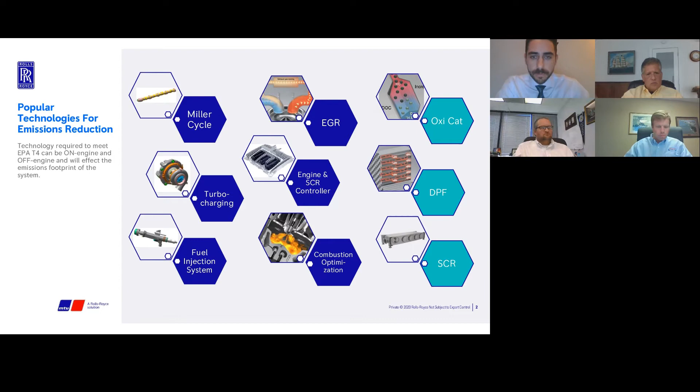For the purposes of this presentation, most of the market has moved towards SCR technology, so I'm going to focus on that. The benefits of combining on-engine technologies with an SCR behind it: when you combine these different strategies, you can reduce the hydrocarbons in the cylinder, in the combustion chamber, to the EPA Tier 4 limits. You can reduce the particulate matter to Tier 4 limits. You can reduce oil consumption, improve fuel consumption through a better specific fuel consumption. That comes at a strategic increase of NOx, so we've all decided we're going to handle NOx after the engine within the selective catalytic reduction.

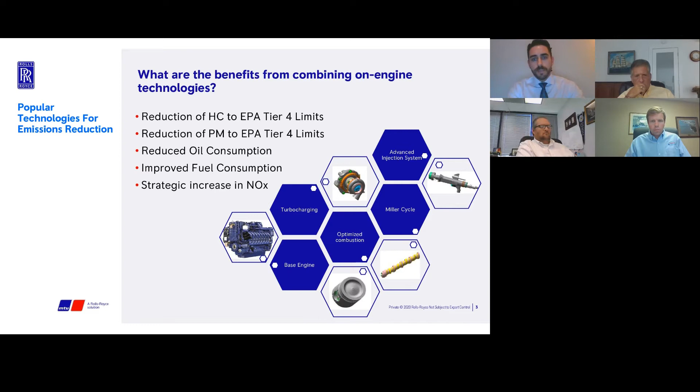So the SCR technology behind the engine, the penalty in NOx can be easily offset with the SCR system as discussed before. There's an integrated closed loop controller that monitors the NOx in and NOx out of the system, and can adjust the DEF dosing. The engine and SCR controller allows all of these technologies to work at the most efficient levels, so you're not exactly blind dosing, if you will.

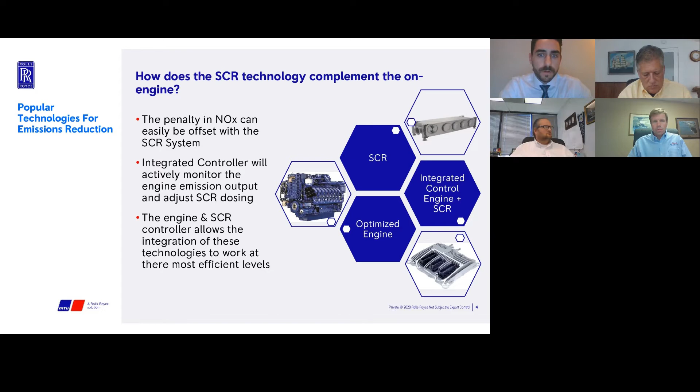Most importantly, from the perspective of customers out there, or someone new to EPA Tier 4 technology wondering how this new technology is going to impact them, I've created a couple slides of the considerations and the benefits. So, operator considerations.

It's no secret, the SCR technology after the engine requires a larger footprint for the overall propulsion package, and tankage, specialized tankage, climate controls, those kinds of things. So this all has to be considered in the design phase of the project.

It requires increased ventilation because the SCR rejects heat, so you have to do an analysis on the volumetric air flow through the engine room and make sure that's taken into account.

In some cases, air versus airless dosing. If you're doing air dosing, you need a larger compressor with clean air in order to make sure the system functions properly. This could result in increased cost and space claim for a larger clean air compressor. It just needs to be taken into consideration during the design phase.

There's additional maintenance with this new technology, so there will be some increased costs to the operator in the life cycle cost studies. And now there's a little bit more administrative work, because the EPA requires delegated assembly tracking of these components as they make their way into the marketplace.

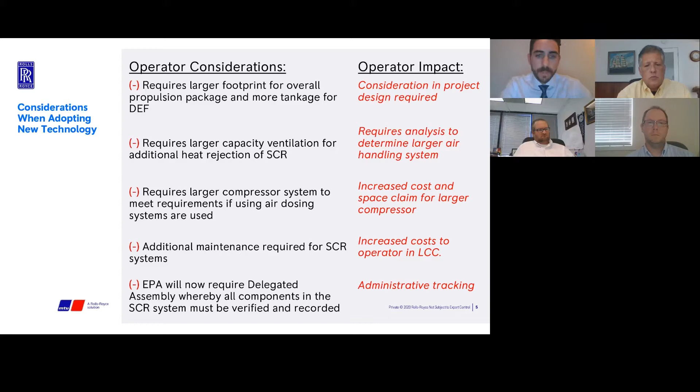So the benefits: the base engine remains fairly the same. The diesel engine that you used to see in the past for Tier 3 looks very similar to the diesel engine for Tier 4 if you're using SCR.

The fuel system could be a little bit different. There could be some small changes here or there, but for the most part it's the same foundation. It also allows for the best fuel consumption throughout the performance map, because you can tweak the specific fuel consumption and the internal combustion, since the NOx will be offset after the engine.

But of course, there will be costs associated with DEF consumption.

The SCR system reduces some exhaust-borne noise and can minimize the muffler size that's needed. You may only need a pancake muffler after. So there could be some potential savings where you don't have to have a larger muffler with a large space claim in a stack. There is little to no impact on transient performance, so you'll still experience good engine acceleration and low-end torque.

The SCR allows the use of various sulfur fuels around the world, and this is a pretty important one, considering that some of these vessels move throughout various parts of the world, and you never know what kind of sulfur content you're going to get in your fuel. So it gives you some operational flexibility.

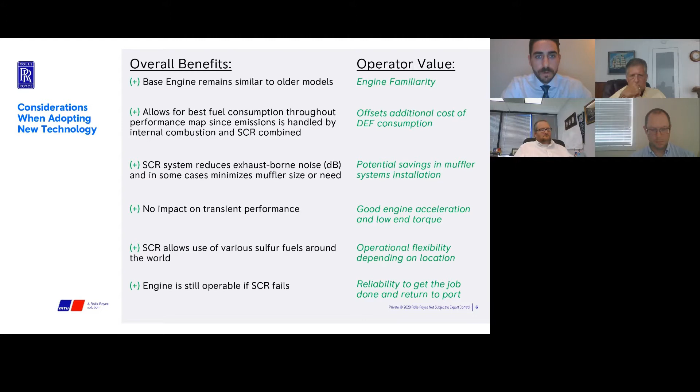And the engine can still operate if the SCR fails, so this is a benefit from a reliability standpoint. So those are the considerations and benefits for this technology.

And just to give you a little idea of the space claim of these types of systems, here's a profile, and then some renderings of some systems that have been designed into different vessels.

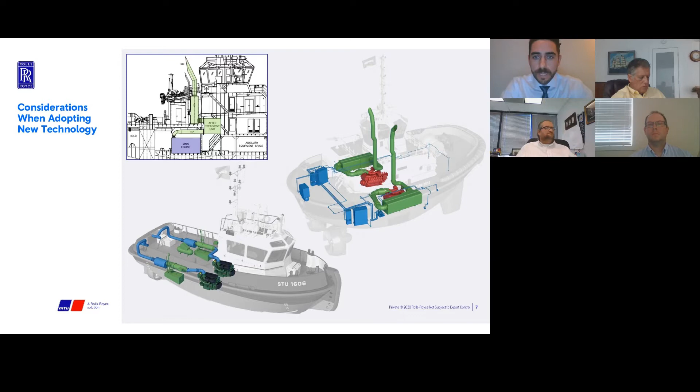So thanks, everyone. I just want to turn it over to Rich at this point, but thanks for giving me the time. Richard, are you able to drive from your side, or do you need me to help you? Can you drive? Would you mind driving, Jim?

There you go. Good afternoon, everyone, glad to be here with you today. I'm going to give you a quick update on the EMD Tier 4 solution.

Obviously, customer comes first. We want to make sure that you always have the highest possible uptime, lowest OPEX, lowest CAPEX. And from a service and maintenance point of view, we need to keep it as easy for your crews to understand and to maintain as possible. And we don't want to compromise on the engine performance that you're used to from Tier 2 and Tier 3, because we equate transient response with operational safety, maneuverability. It has to be as easy to operate and service as previous engines.

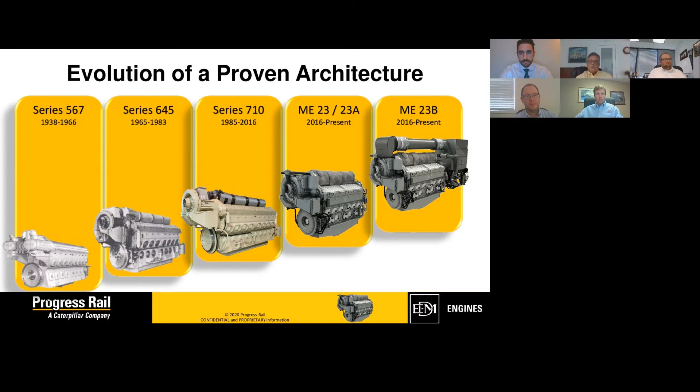So by using that as the background for the discussion here, the previous generation engines, the largest portion of the population that's operating on the lower rivers, on the U.S. inland rivers, lower Mississippi, upper Mississippi, Ohio, and other tributaries. Relative to those older engines that are 30, 40 years old, today's Tier 4 engine consumes quite a bit less lube oil, on the order of 60% less than those older engines, their earlier designs. We've come up with kits to help reduce that, but using the original lube oil consumption of the original engines, that number is quite large.

Double-digit reductions in fuel consumption as well. And the transient smoke is also much lower than the predecessor engine because the turbocharger moves more air, relatively speaking. We've increased the output -- back in the 80s with the original 710 engine, and today's evolution of that engine moves a lot more air, and so you get that transient response with a minimal exhaust opacity.

And so, as easily understandable, we have Tier 4 certification. That means we emit very low levels of NOx and particulate matter below the regulated standard, and do it with less smoke and without compromising that transient response.

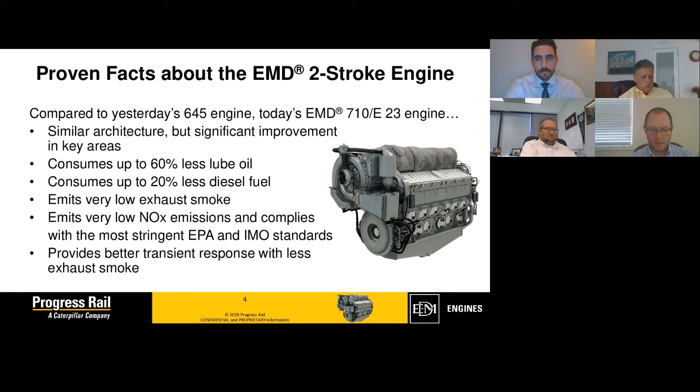With the SCR approach -- I believe I speak for my Caterpillar colleagues as well -- using their approach to the dosing control system and to the SCR approach, we're able to maintain the transient response while reducing NOx, which in many other cases, reducing NOx using other technologies such as EGR actually comes at the cost of transient response. So we've maintained that superiority going forward with Tier 4.

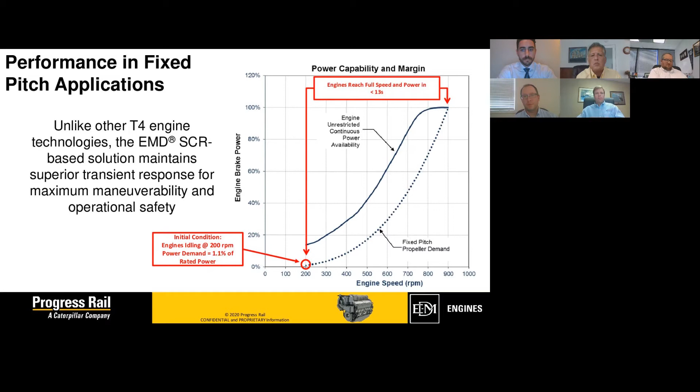Hybrid is becoming a common discussion point in the industry, as we're all trying to find ways to reduce emissions and work with flexible powertrain systems. High transient response is also a benefit for diesel-electric solutions, whether constant speed or variable speed. An engine with very quick transient response is a favorite of electrical engineers and designers that engineer these hybrid systems, because whenever there's a transition from one power source to another, the faster it can respond, the more transparent the operation is to the pilot.

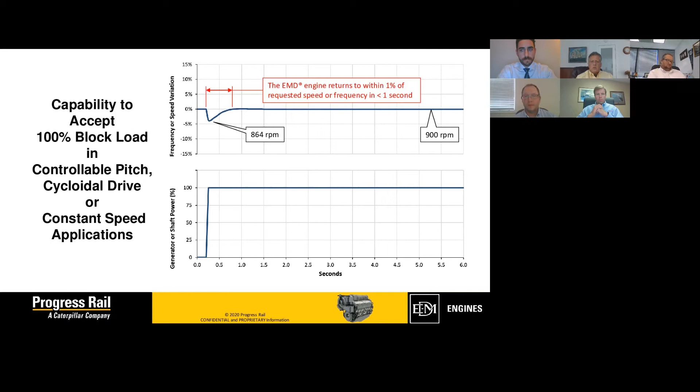Using that small size enclosure, relatively speaking, for a medium speed engine, and then using Caterpillar's closed loop dosing control system—looking at the pictures Tim Peters showed earlier, many of those Caterpillar powered boats use the same exact dosing control system. So there's commonality building across the fleets there as well.

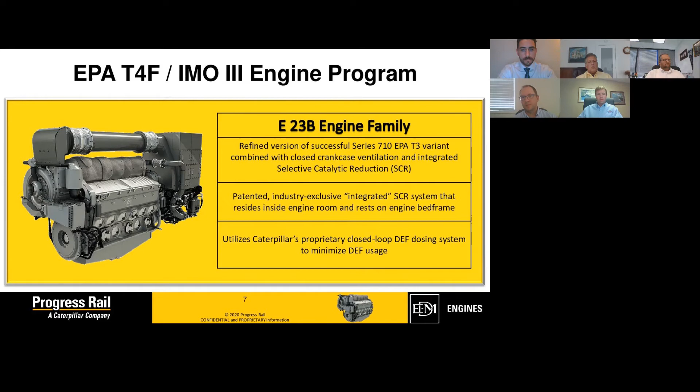We would install the engine first, then the structure beneath the SCR, which we call the accessory rack. It's a very stout frame that rests on the engine bed frame. It contains, just for space saving reasons, some engine accessories like lube oil cooler, lube oil filter, and thermostatic valves, so those don't have to be located elsewhere in the engine room.

It's a kind of labyrinth flow SCR, not just a straight through kind of flow path. There's a lot of benefit to this when it comes to installing a Tier 4 medium speed engine into a vessel, into a workboat.

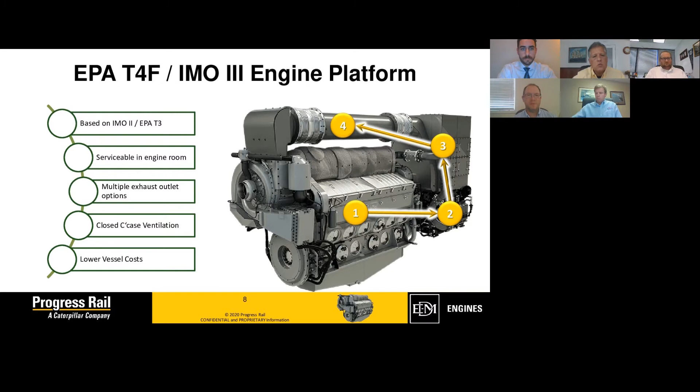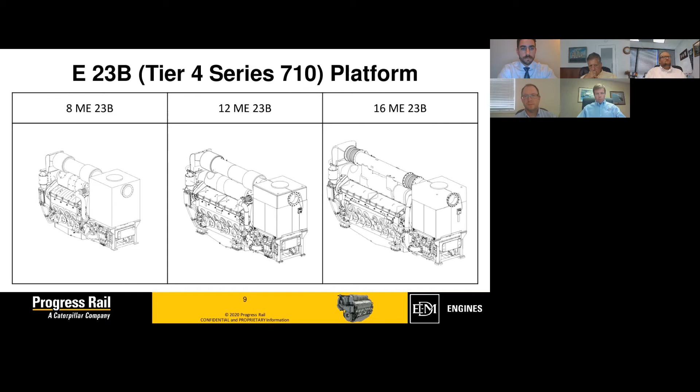Our very first Tier 4 delivery several years ago was for the Washington State Ferry MV Suquamish, and that one has been operating since 2017.

Staten Island Ferry is, you probably have seen videos and press releases of them launching the Ollis class ferries there. So those have not entered service yet, but those are underway at the shipyard.

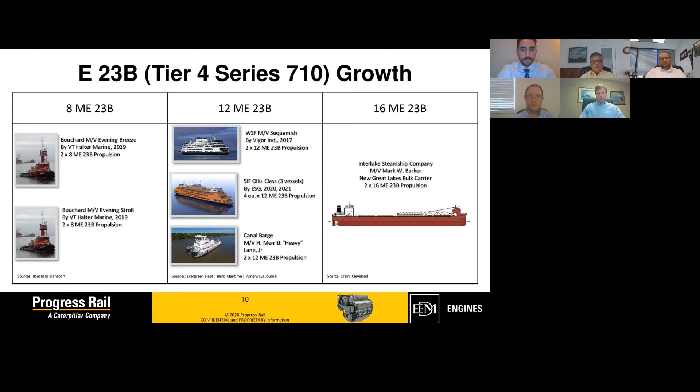I'm going to highlight our references with Canal Barge. You can move on to the next slide here, Jim.

The H. Merritt Heavy Lane Jr. is our very first Tier 4 reference on the rivers, and it's the very first EMD Tier 4 engines in operation on the lower Mississippi River. Again, we're very honored to have earned Canal Barge's trust for this project.

Canal Barge did a lot of research into the appropriate power for this project, and we were very, very honored to have won it. It's a traditional fixed pitch propeller drive, so all the merits that I explained earlier that we tried to preserve with the previous engines, we believe those added value for our value proposition here for the Heavy Lane. It's their flagship vessel, and as far as I understand, I believe these are the only medium speed Tier 4 engines operating on the lower Mississippi River.

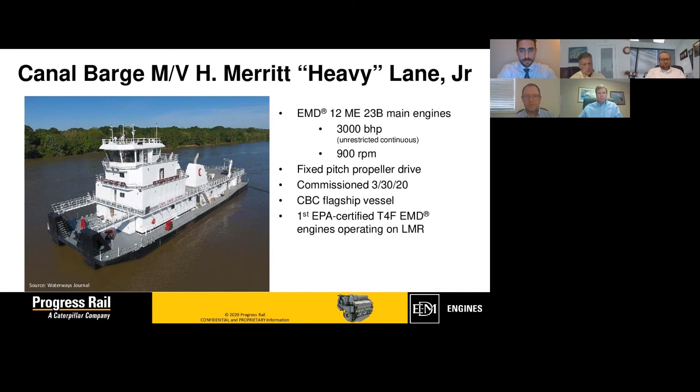So where do we go from here? Where have we been heading with the technology fairly well defined, fairly well accepted? We've been communicating the information on the solution for several years now, and we've taken input from industry on how to further improve it. On the engine side, it's essentially the same engine, just improved.

It's that constant improvement approach, reducing lube oil consumption to make it work better for Tier 4. There are obviously additional diagnostics to talk to the after treatment system, so there's some additional operator training happening there, but no major structural changes from the predecessor product, which is, I believe, again, a benefit, because your tooling is largely the same for servicing the engine. Understanding how the engine operates, troubleshooting it, is unchanged.

Moving to the right side of the slide here, this is where the focus has been from a training and diagnostics and technology comprehension point of view, knowing that we're leveraging our being owned by Caterpillar. You can see the footer of my slides there. We are a Caterpillar company, leveraging not just their products, but working together on understanding how the products should work to meet our customers' needs.

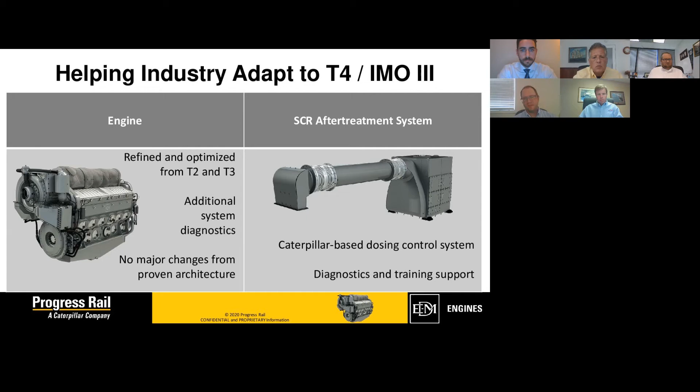In the slightly longer term, this is on the horizon, we're taking a bit of a reverse approach. We started out with an integrated package that's all plug and play, but now we're working with shipyards, naval architects, and end customers on applications where the engine room is too tight for both the SCR and the engine. So we're working with them on properly applying the SCR to remote locations.

Whether that means us just verifying pressure drops from the engine to the SCR, or actually having our engineers do a computational fluid dynamics simulation that helps us understand the DEF vaporization and distribution through the catalyst, everything that's needed to make sure the shipyard, naval architects, and end customers have confidence that the system will be fully compliant with EPA requirements.

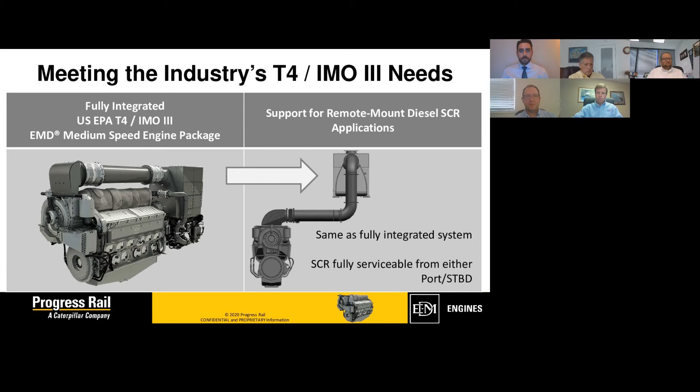And that's in a nutshell, a summary of what you've gone through.

Now, John Burton, are you able to join us on phone? I hope so, can you hear me? Yes, no, it's good.

So I can kind of carry on some of the message. When everybody hears after treatment, it's panic. We don't want this. So just fast forward to slide 3, Jim, and I'll start right there.

We're on slide 3. The feedback we get is this is too big, we don't want this thing, we can't get DEF. You've heard all the technical presentation from the guys here, so we're all using similar technology.

What we did, we took this message out to the field. We went out and talked to the naval architects, the customers, and the operators. The naval architects and ship designers and builders took a look at these and said, okay, this doesn't look so bad, we can work with this. At the end of the story, when some of these boats are out here running, the feedback we get is this SCR stuff was no big deal.

So the message is it's tried and true technology. It's been around since the 1950s. It's proven and simple technology, fairly easy to install. So forward, Jim.

We went out and talked to all these people, talked to the naval architects. We took our technical team to talk to your technical teams out there. We brought some of our factory engineers to the job sites. We did a lot of teleconferences with naval architects to go over what we call the virtual design review. So we were more or less remote consultants on some of these designs.

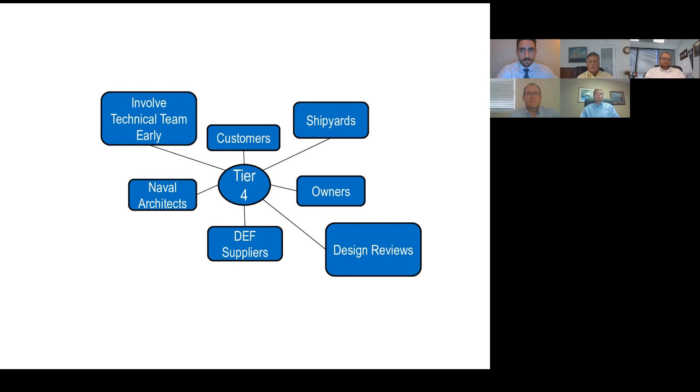How does the engine room look? Are these components laid out properly? We can't fit this - is there anything we can do? So we worked directly with a lot of the shipyards and naval architects to make sure these installations went well. On-site support, remote support, a lot of people on the phone. I was at your site. So forward.

And here we are. So we've got widening acceptance of the Tier 4 product, the IMO 3 product. In the U.S., we're governed by the EPA Tier 4 guidelines, but there are a lot of successful projects on all of the coasts, starting to gain a little bit of traction on the inland rivers, as Rich and Tim pointed out. There's also rapid acceptance and rapid growth to meet IMO 3 regulations, primarily in Europe, to meet those inland waterway requirements over there.

And so, we're all here to help you be successful in your projects, give advice. Rich commented that he had engineers on site. Tim's talking about technology. So we're all here to help you design these, help you guide your designers, be there to help these projects be successful. So my message, reach out, come talk to us. We're here to help.

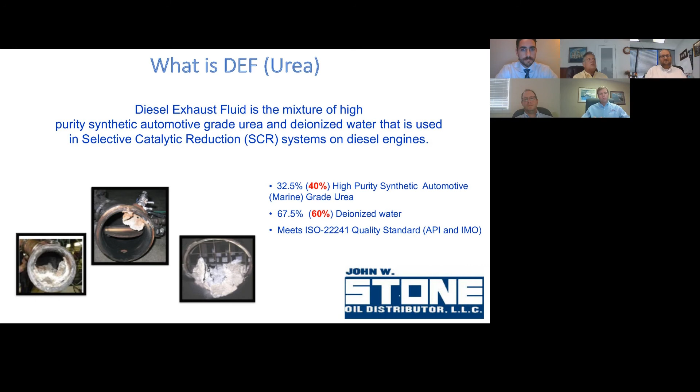There's some operational issues that need to be resolved, but from our conversations with the OEMs, it's been that you can't intermix the 32.5% and the 40%. So I'll go on to the next slide.

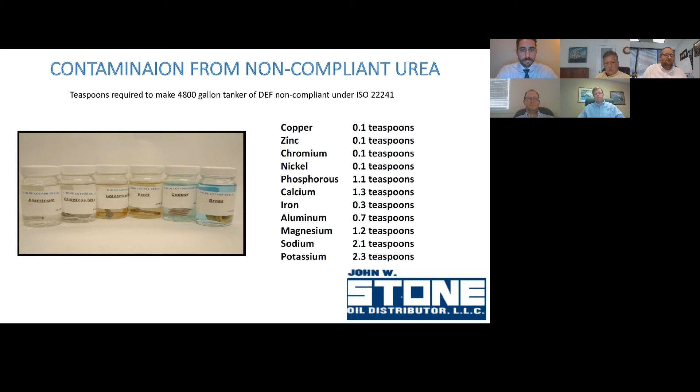As a visual, we've got some samples out there. Just as a visual notation, by no means is that the only way to take a look at it, but you should be asking for a certificate of quality, much like you'd be asking for a certificate of quality or certificate of analysis on your fuel. You ought to be taking a look at and asking for a certificate of analysis on the urea.

Again, there's always been concern about handling protocol and PPE requirements. As an overarching comment, we've been delivering urea and DEF in the maritime field since about 2011. I'm going to tell you what I tell our truck drivers: use the same precautions you would when handling diesel. If you feel you need gloves, use gloves. If you feel you need a face mask or eye protection, absolutely, we encourage it. But it's not something to be afraid of.

In past presentations, Jim and some of the other guys have seen me pour the 40% urea on my hand and just wash it off. There are some cute anecdotes I've got for you, and a few not-so-cute, a little disgusting anecdotes I could share with you offline, but it's not something to be fearful of.

Some of y'all are dry cargo haulers. One of the dry cargoes out there is urea, is fertilizer. Treat it like fertilizer — that's the basis of it from a 50,000 foot view. It's a purified fertilizer with purified water. If you're not afraid of handling urea fertilizer, then you shouldn't be afraid of handling this stuff either.

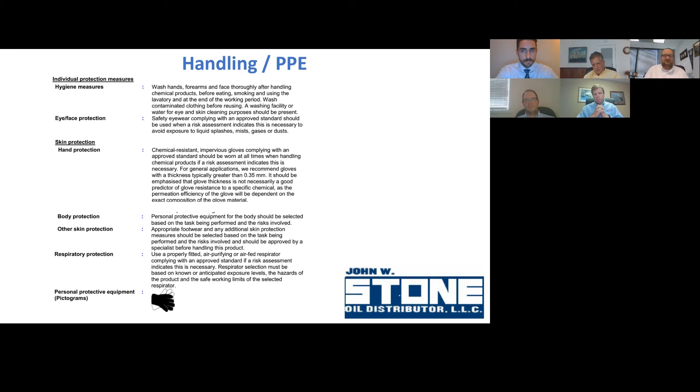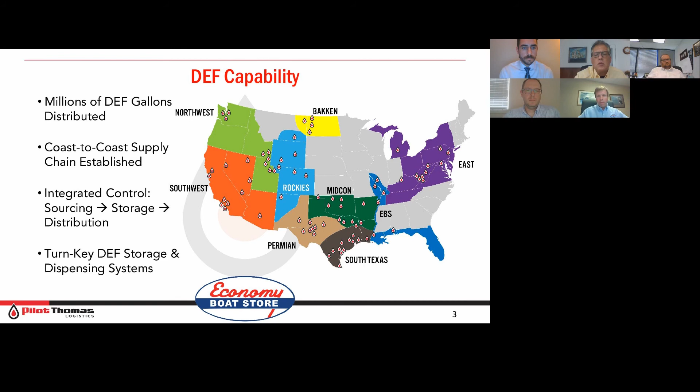Through some of our affiliate relationships, we've actually got connections with manufacturers of DEF as well. In various channels and distribution markets across the country, we've also got turnkey DEF storage and dispensing systems. So from a capability standpoint, we certainly have that squared away.

Secondly, from an availability standpoint - Tony mentioned it, and a couple other presenters have as well - there's a couple different specs of DEF available. One is the 32.5% blend, the other is a 40% marine spec that you often see. We're actually capable of supplying either one. From a marine standpoint, some OEMs have advised they'd prefer the 40%. The 32.5% is certainly what you see on highway or over-the-road vehicles.

From a supply perspective, the 32.5% is much more prevalent. But if there's a tendency toward the 40%, Economy Boat Store and other suppliers or midstreamers out there certainly are, or should be, capable of providing that for you.

In terms of our delivery or transfer capabilities, what we've done up to this point is primarily deliver via 55-gallon drums or 330-gallon totes. With our fuel flats throughout the system, we've got a bulk offering concept designed, though we haven't formally made that investment to make it available yet. Some of that's working with our customers to better understand demand forecast and demand profile, but the investment's ready.

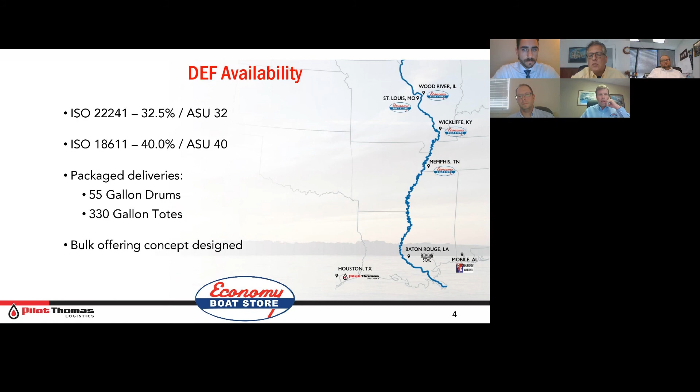Quality control wise, a couple of things Tony mentioned - I thought that was a great slide on how sensitive this is to chemical impurities. It's certainly a high maintenance product to some extent, but it just requires specified or dedicated tanks, pumps, hoses, and nozzles - not a considerable investment. Stainless or poly tanks are required to maintain the integrity of the product, so keep that in mind when working with OEMs or manufacturers and engineers on putting this equipment in your vessels.

A couple other points: it does have a freezing point, something to keep in mind, and the 32.5% product actually has a much lower freezing point. Some of our more northern locations, Memphis North as an example, 32 degrees could come into play - so that's another potential benefit of the 32.5% option.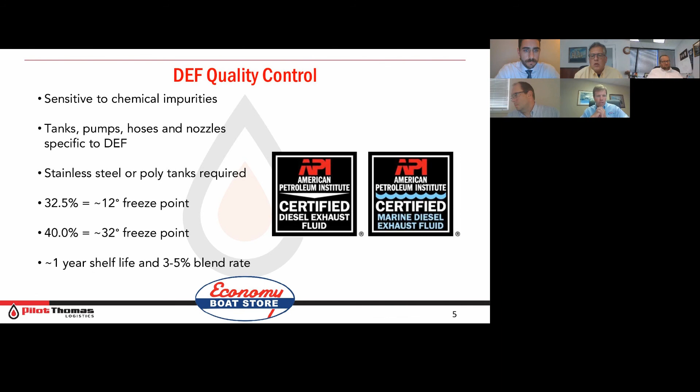Lastly, just a couple points - the useful life on DEF is about 1 year. Avoid direct sunlight, manage it at correct temperatures, and from a consumption standpoint, for every 100 gallons of diesel consumed, we'd estimate a 3 to 5% ratio of DEF for urea. Similar to other midstreamers or suppliers out there, we pride ourselves at Economy Boat Store on making product available when and where it's needed most.

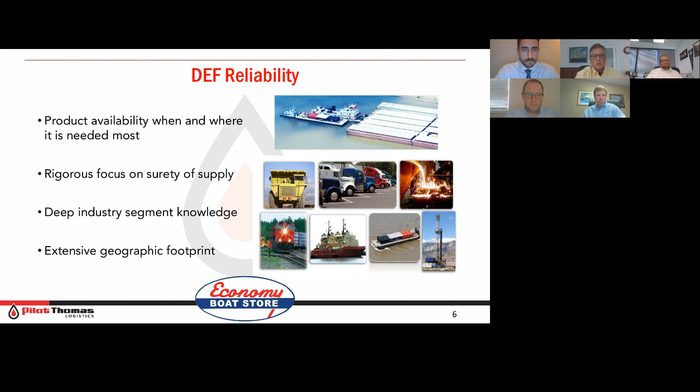We're obsessed with being reliable and have that rigorous focus on supply. We've got deep industry knowledge and a footprint that can make this product available when and where you need it most. That's all I've got.

Well, thank you, David, and thank you to the whole panel. What I'd like to suggest, we only have about 7 minutes left of our time slot. Again, we're not debating, we are championing together, albeit some of us are somewhat competitors in our spaces. But we are collaborative members of the success of the industry. So we're very happy to provide some of the progress and work with customers, the stakeholders, the owner-operators, the naval architects, shipyards, and the supply chain. We all work together to try to be advocating and championing the business conducted on the rivers.